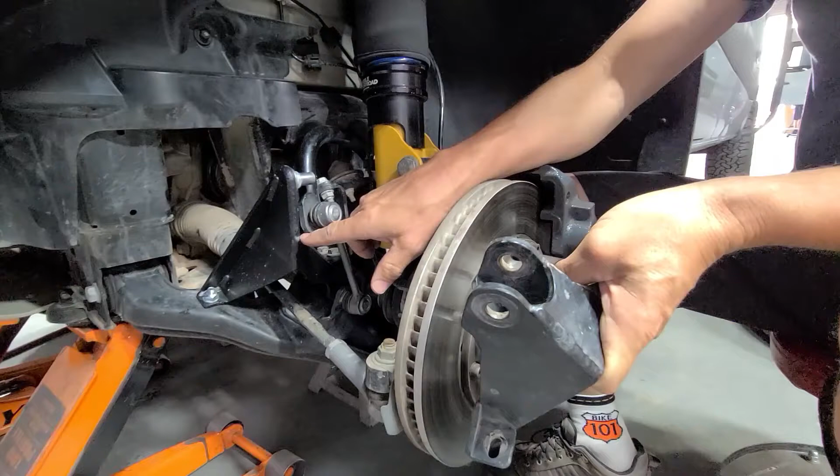Benefits of the new Agile Max. What we've done is we've taken the shock mount, we put it on this side of the sway bar. Originally, it was mounted pretty far back in. It would have been in position about right here. So as the lower arm goes through the travel, the shock was literally just idling back and forth here.

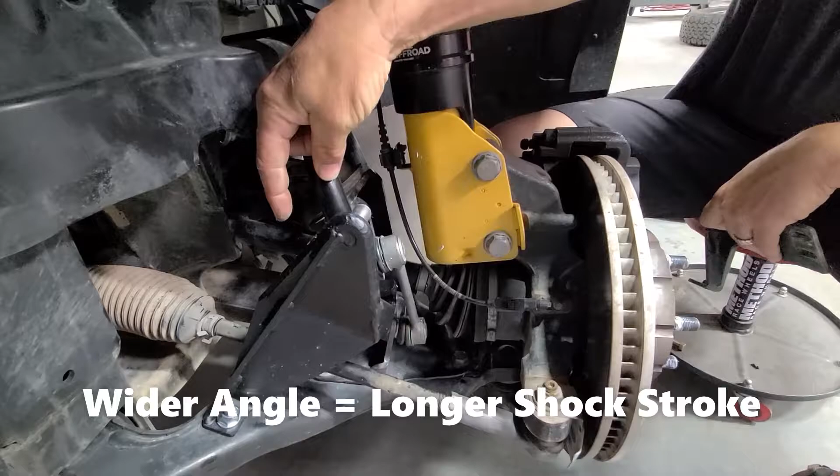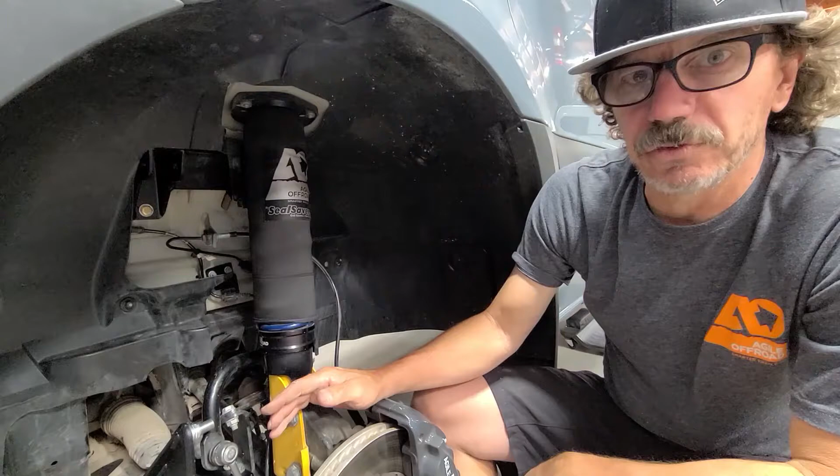So what we were able to do with this Max auxiliary shock is we moved it out here, close to 2 inches, and that gave us more of a mechanical advantage on the shock. So now we're taking this shock here, which is positioned up here in this mount, down to here. We're stroking that shock a total of 5 inches from full extension to full compression, where on the old kit, we were doing about 2 3/4 of an inch. So it's a substantial improvement in mechanical advantage with the shock.

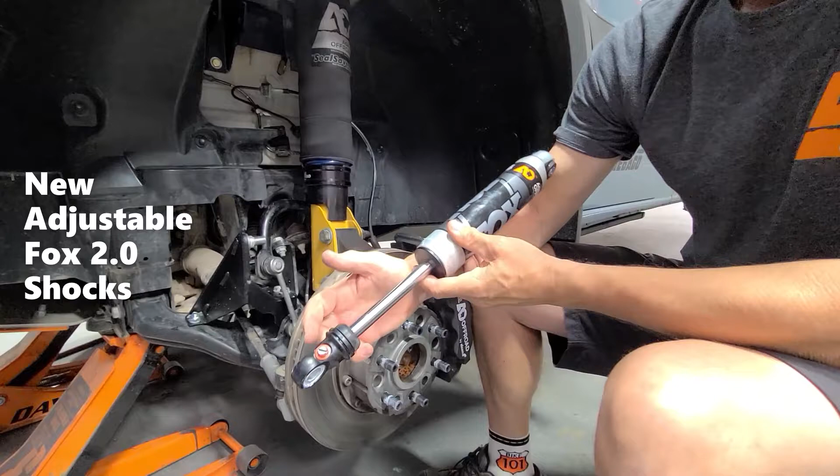And then now we've outfitted you with this prototype Fox. This has an adjuster in the bottom of it, and this allows you to adjust. There's 20 settings on this shock. This will allow you to adjust both the compression and the rebound at the same time with those 20 settings.

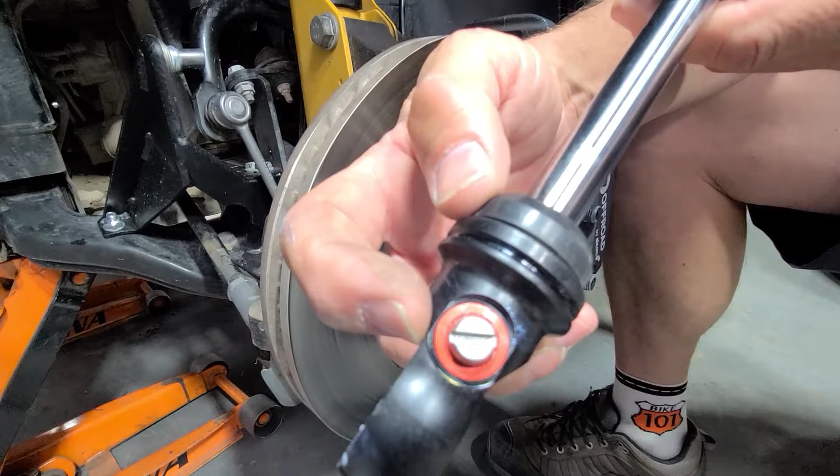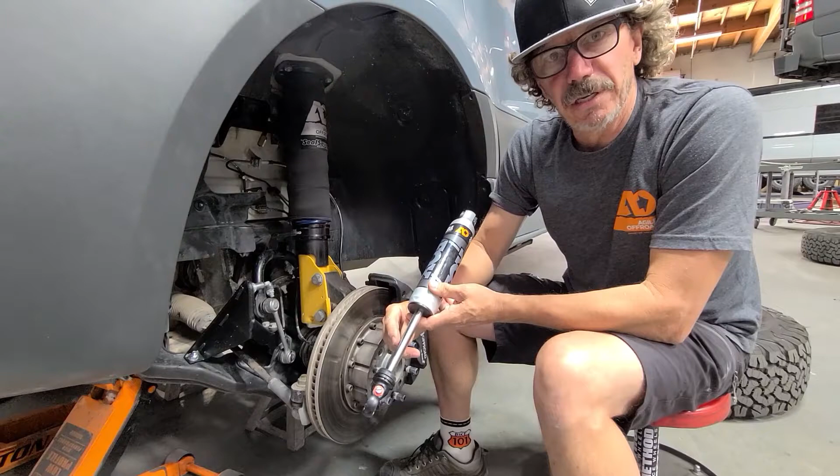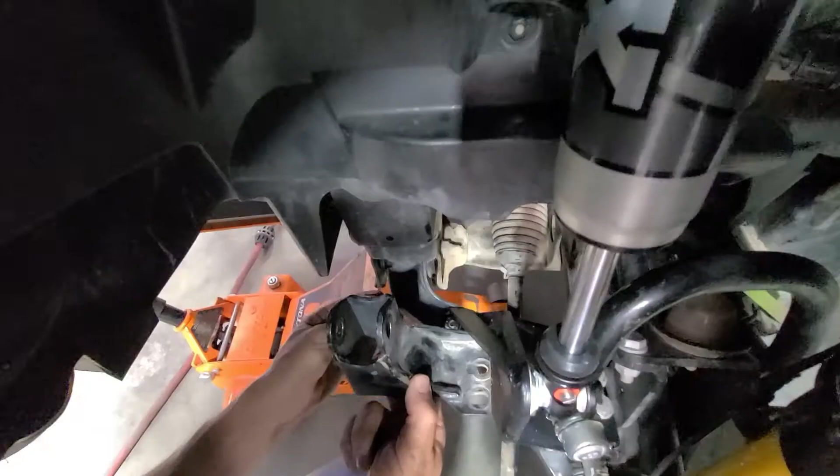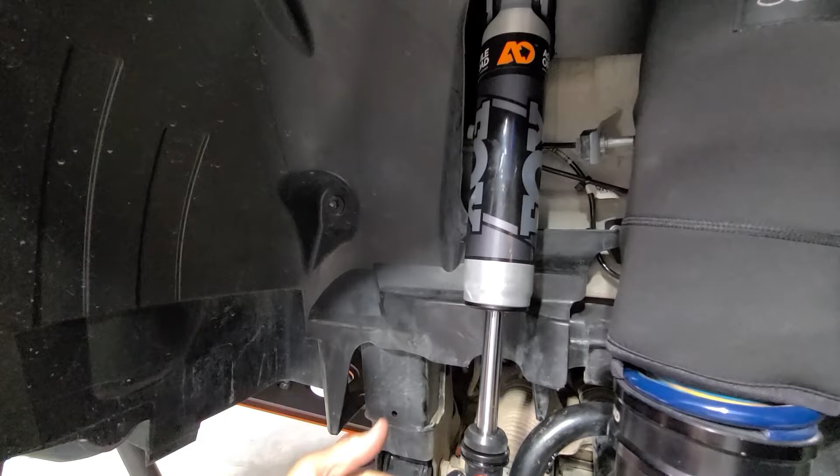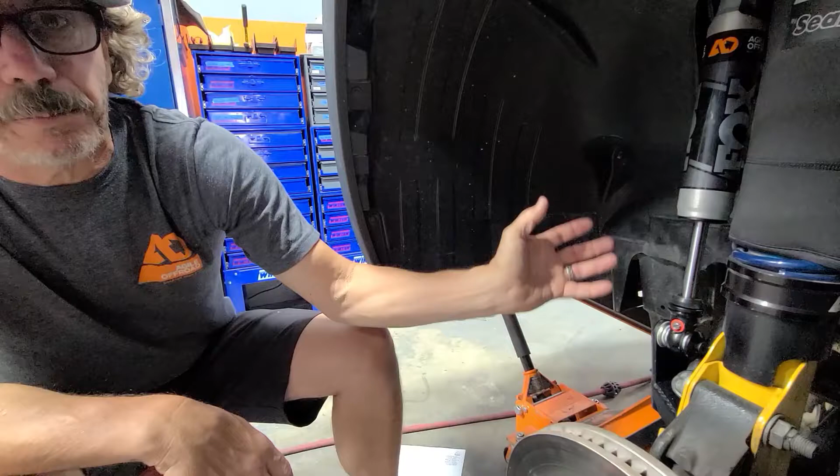By moving this shock from this location out, which is about 2 inches, we were able to increase that mechanical advantage. So it's all about bringing this shock as far out as possible, and that makes a mechanical advantage in the shock. And then any of your tuning that you're doing in here with that more mechanical advantage, you'll see bigger improvement. So as you turn this, again on yours, I think you're set on number 3.

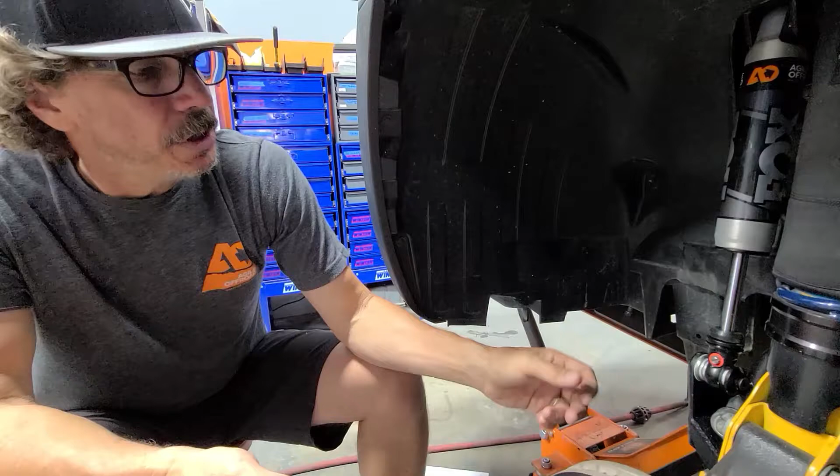We actually had it set on number 10, and you could really feel it was an aggressive shock up front. So we just backed it off a few clicks. So like when you're going out to the desert or something like that, you're carrying a big load, you can always just come down here, pop a quarter into here, and be able to turn that 1 or 2 clicks. And again, that's gonna affect both rebound and compression at the same time.

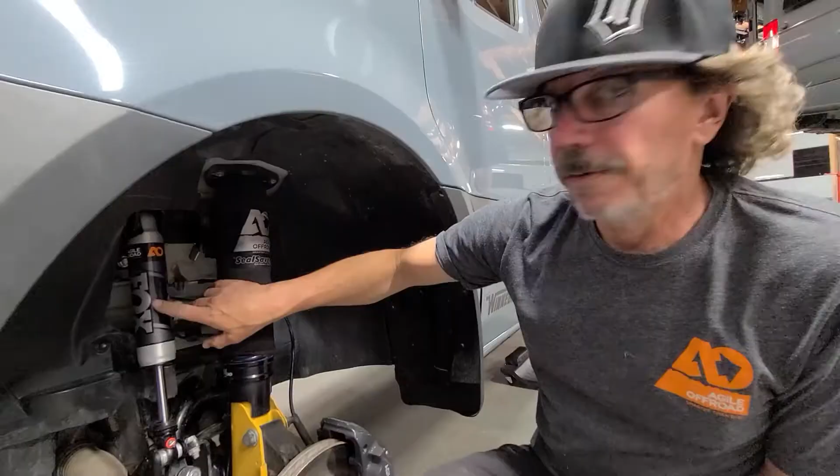Here's the shock in position. You can actually see where it's angling out. It's a similar angle to the factory strut. Of course, the further out we get that shock, the better mechanical advantage we'll have. In the case of the strut, these are about 7 1/4, 7.1 inches of travel. So we're getting full extension and compression out of this strut, and then we'll get full compression and extension out of this shock here. In our R&D, we actually were able to remove even this bump stop and still stroke all the way through it.

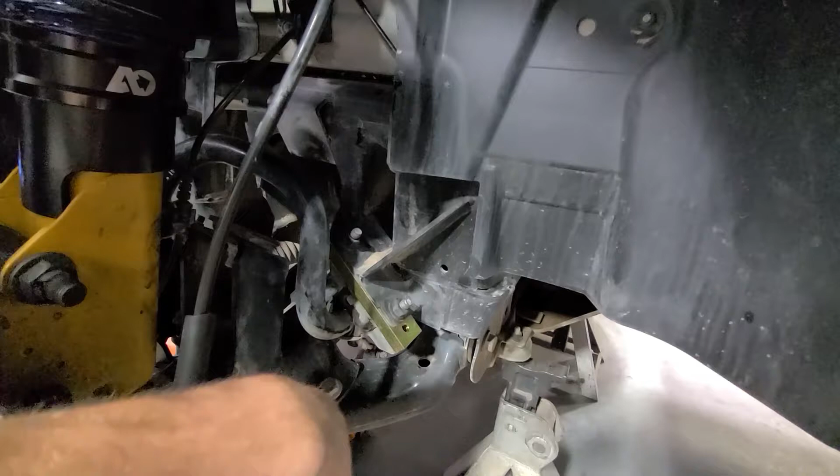To get the shock out into this location, because it needs to be specifically in this area, we did have to relocate the sway bar. So see here we have a block. It's kind of an adapter. This allows us to take the sway bar and actually just cheat it back a little bit. Your factory bolts will hold in the gold block. This is a piece of billet steel, and then you'll have a new bolt that repositions and moves the sway bar. And you can see it moves roughly about 3/4 of an inch back.

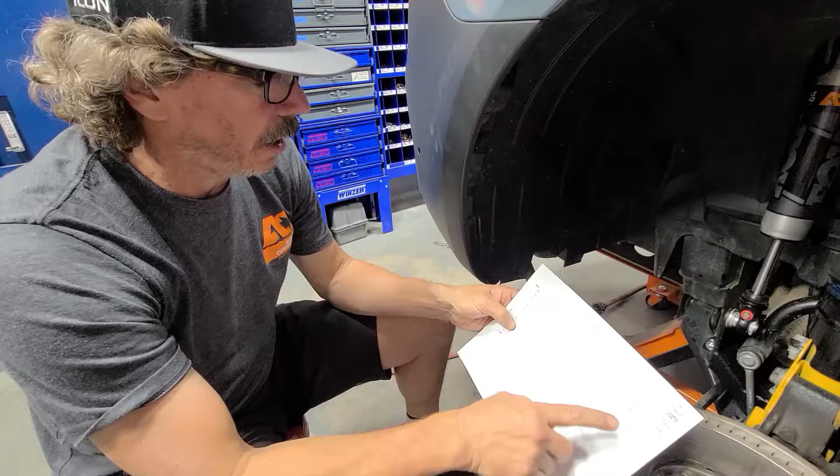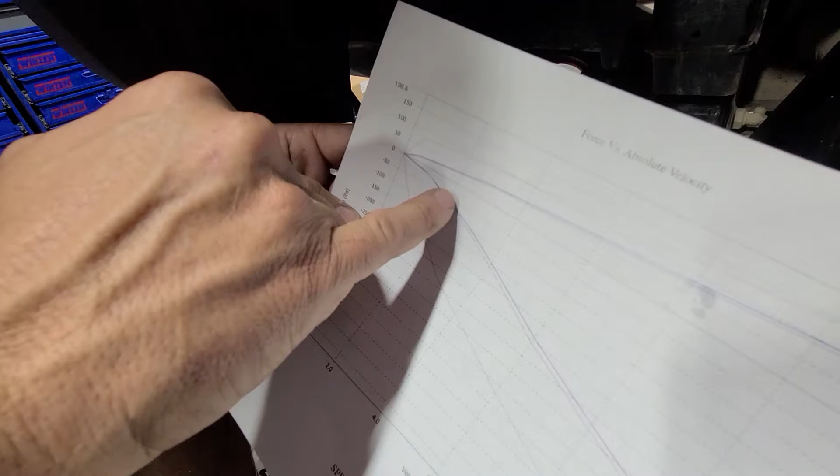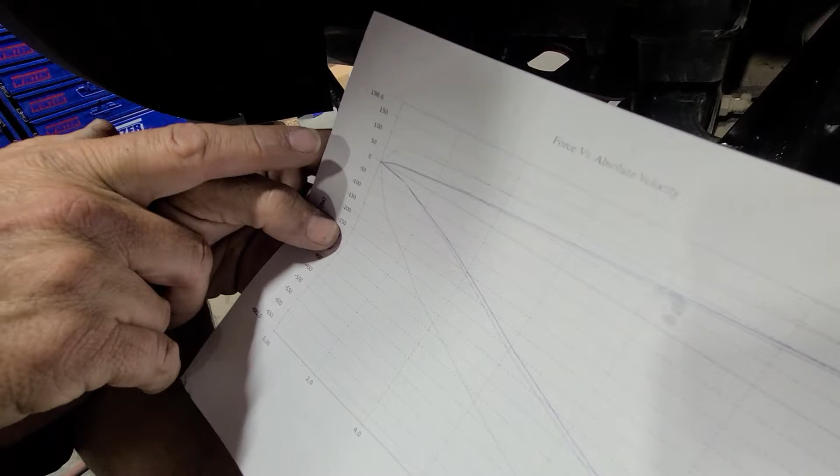Here's a dyno sheet. Again, this shock has 20 adjustments in it. So here's your first adjustment here. We only had time to do a few of the dyno tests. You can see 3 runs are done here. So primarily you're going to see this improvement. Here's your stiffest settings here and here. So this is your force, and then this is the speed the shock's moving.

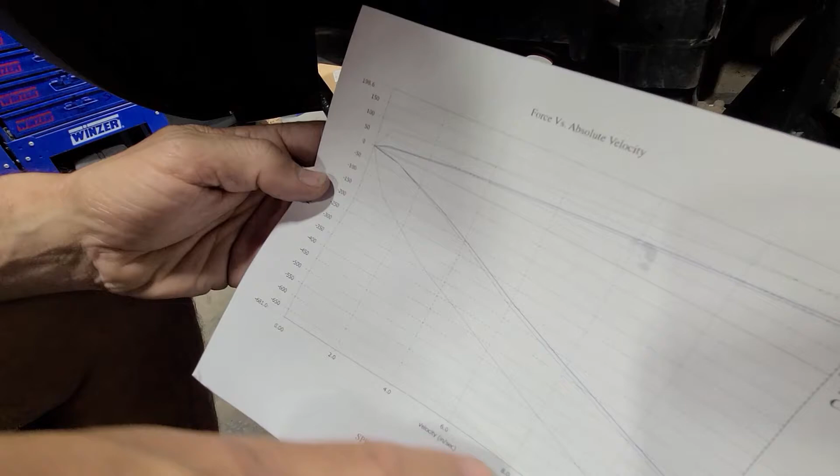You also notice that this graph here is substantially smaller. So here's 150 there, here's 150 here, and you can see this one goes all the way to 650. So always by design, a shock will have more rebound control because of the piston design with the smaller holes in it over the compression control.

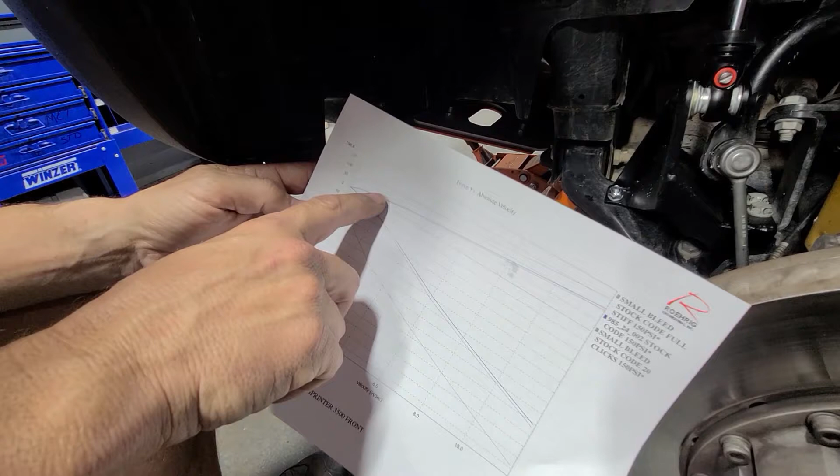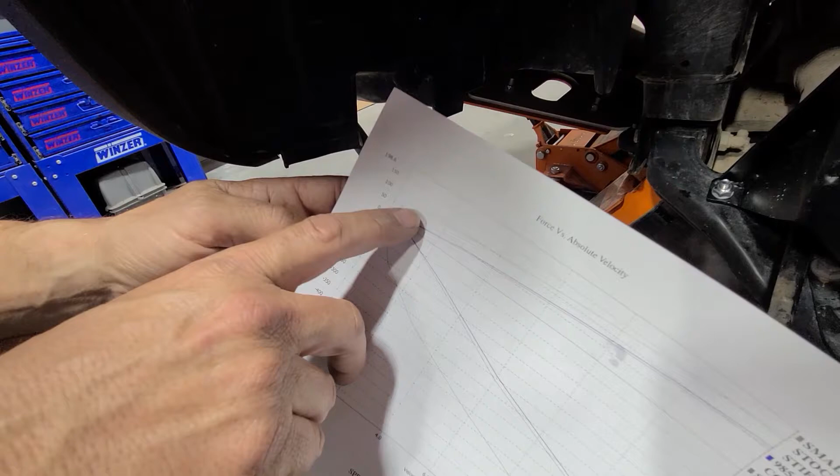So when you talk about a compression adjustment, yeah, it can be significant. You might feel it in the seat of your pants, but honestly, you don't see that big of an improvement in the force. So here we're going from 0 to 50. Here you can see where you got this 0 to 50. At the heavier setting, you'll be able to just spike it right away. But at the high end, your pounds are, what do we got here? About 100 and 150 pounds of force difference.

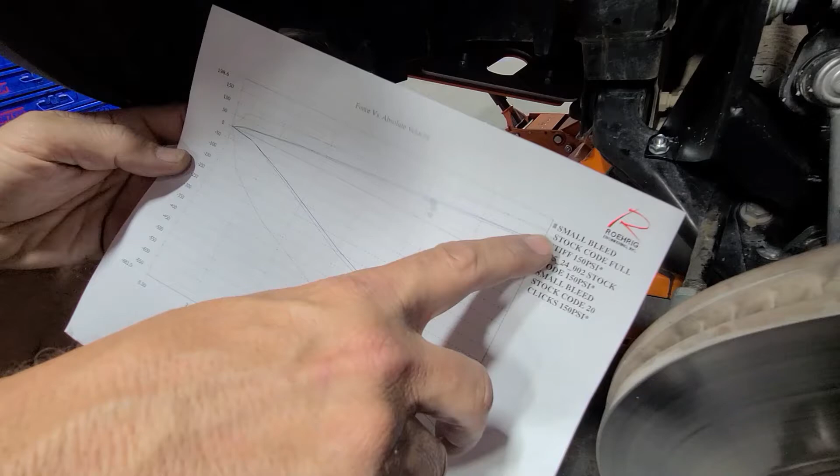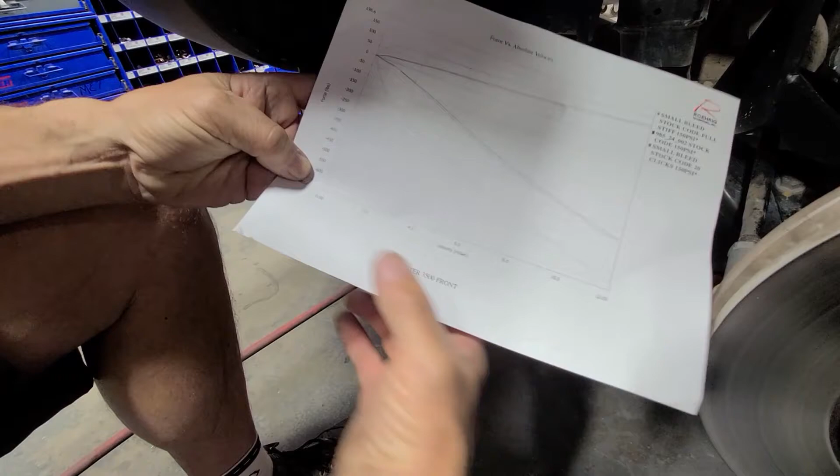On rebound, you're going to see this one here on number 1. We're at 450. And on your highest setting, you're up almost about 650.